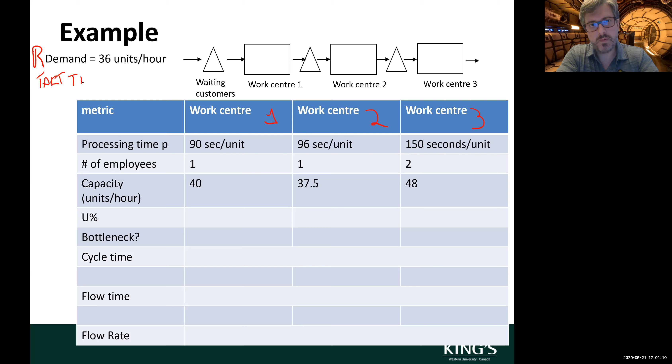So this is a simple example. I have 3 workstations here, work center 1, 2, and 3, right? And I have a demand of 36 units per hour. So 36 units per hour, this could be my flow rate, right? And if I want to think in terms of takt time, this would represent a takt time of roughly, what is it that I have again? 100 seconds, 100 seconds per unit, right? That's my takt time right there.

So I want to observe by the end of this process, every 100 seconds, 1 unit should be leaving my process. If it's a product, I'm shipping 1 unit to my client. If it's an order, it's going through. If it's a service, it's the end of the service, right? So here are the processing times. I have 90 seconds for work center number 1, 96 seconds for work center number 2, 150 seconds for work

center number 3. So by looking at the process times by themselves, I can't really say anything because it seems that work center number 3 has the highest processing time, the slowest process, so that could be our bottleneck. However, for each workstation, I have a certain number of employees. I have 1 employee over here, 1 employee at work center number 2, and 2 employees on work center number 3. So if I think in terms of capacity, so what is capacity? Capacity is P divided by A times M. I'm increasing the size of M, therefore I should be increasing my capacity, right?

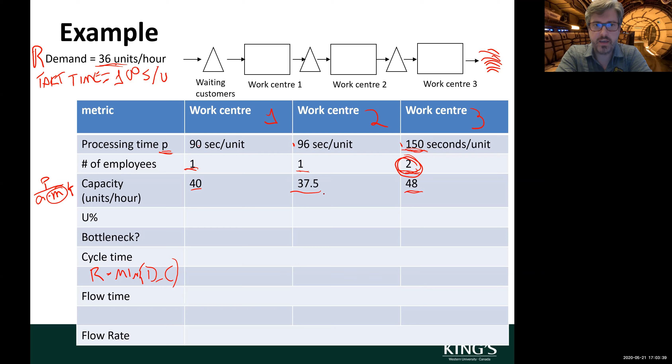So the capacity of this process, I gotta find what the bottleneck is. So the smallest capacity should be the bottleneck. 40, 37.5, and 48. So this is the bottleneck right here, 37.5, sorry. So my flow rate should be either 36 units per hour or 37.5 units per hour. So therefore, we know our flow rate is 36 units per hour. We are demand constrained, right? We have a little bit extra capacity. So we can calculate now our utilization rates.

So 40 divided by 36. So this is roughly 90%, right? So in fact, exactly 0.9. Sorry, wrong place. Just a second. Here, I apologize. There you go. Okay, so utilization rate, 36 divided by 40. This is 0.9. This guy is 36 divided by 37.5. This is 96% or 0.96. Let me move my little guy over here.

Okay. And third work center over here, 36 divided by 48, and this is equal to 75%. Right? So the bottleneck is always the one with the highest utilization rate. So as we were saying before, work center number 2 is our bottleneck, right?

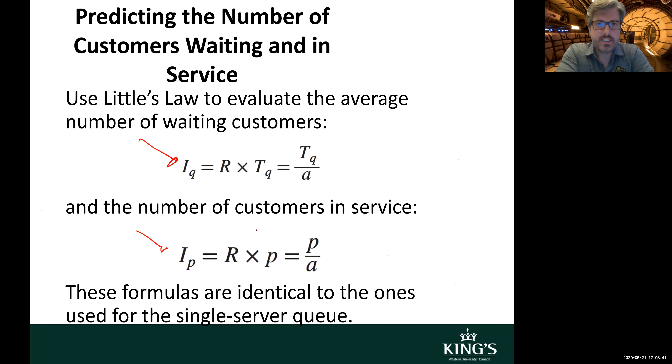So I know my cycle time here is 100 seconds per unit, as a base. And the time in queue for the first work center, considering this processing time and the inter-arrival time a equals 100 seconds per unit, is 810 seconds. The next one has a really high utilization, 96%; this one is 90%, and this one is 75%. So let's see what happens to the time in queue.

The busier you are, the more likely you are to have inventory waiting. So work center number 2 becomes 2,304 seconds, roughly about 1 hour. So in a process that takes 96 seconds, those flow units are waiting 2,300 seconds on average. These are average results in a steady state; things can fluctuate a little bit.

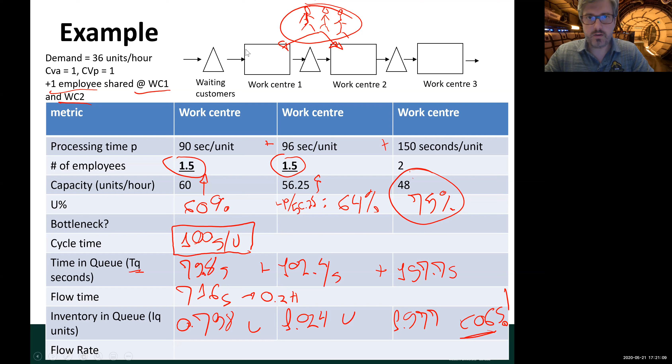Now, let's see if I can do the same stuff with Simul8. All right, so how do I exit this? Do I keep annotated? Yes, I want to keep things annotated. Okay, so now I'm going to go to Simul8, and I'm going to perform the same kind of analysis that I did there, but now using Simul8 instead. Let me make my mouse work over here. Just a moment. Okay, so here's Simul8. Let me hide this guy over here. Excellent. Gotta put my notes in here.

First thing that we gotta do with Simul8 is we go to data and rules, and then we go to clock properties. Everything that we were talking about before for that process was measured in seconds. So let's measure everything in seconds and keep that one single time unit throughout the process. Now, time format doesn't really matter. Can be time of the day, time only, percentage. I'm going to keep percentage just so we understand how far along we are in the simulation. You know what? No. I'm going to use time of the day. I'm going to make a digital clock.

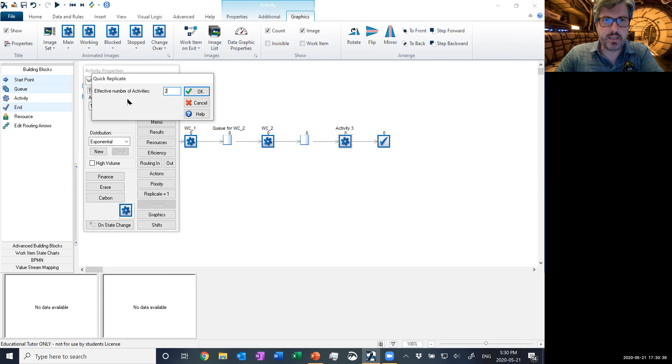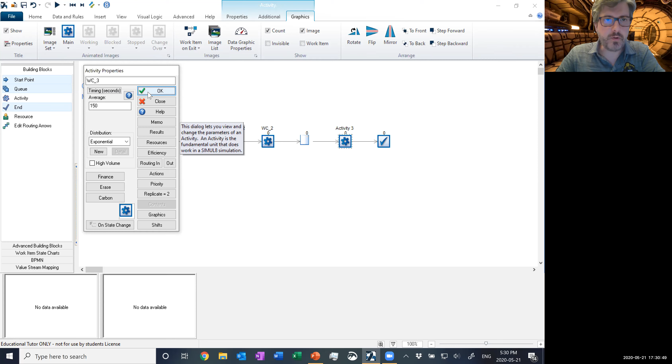Did we change the error? I think we did. So for this guy though, it's 150 seconds exponential distribution. And I do know we have 2 people. So I'm going to add 2 activities. The replication here is 2. So there's 2 activities, in fact, within the workstation, right? Excellent.

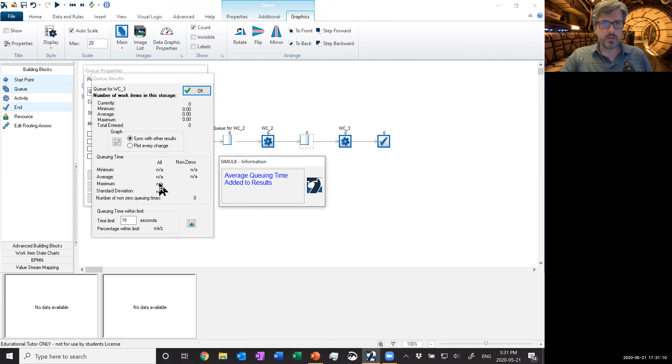Now I'm going to go to my queue. I'm going to go to results, minimum, average, and maximum number of units in inventory. And then also minimum, average, maximum, standard deviation for the time in queue, the queuing time, plus a nice little graph right there. I'm gonna add this dude over here. Yeah. Okay. Nice and pretty.

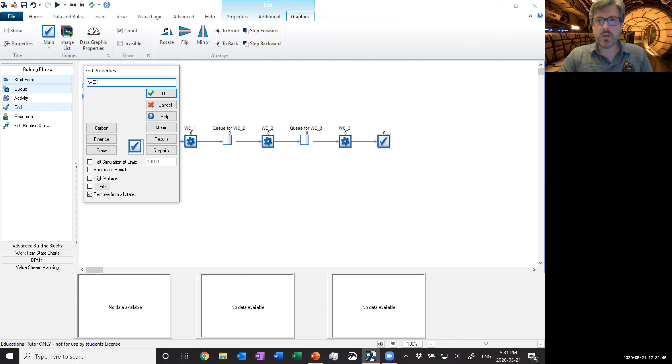We are here in the queue, so I'm going to show the queue name, and this is the exit point. So similar, we have a work entry point, WEP. We have a work exit point, WEX, and I'm going to collect results here too. The minimum time in the system, the average time in the system, the maximum, and the standard deviation. Okay, so I'm gonna hit OK.

One thing that I haven't done yet is save this file, so I'm gonna save it right now before I lose anything. So let me call this example one. I'm gonna put that in my desktop. Excellent. All right, so let's see what's going to happen right now. I will go to home. I'm going to try to set up.

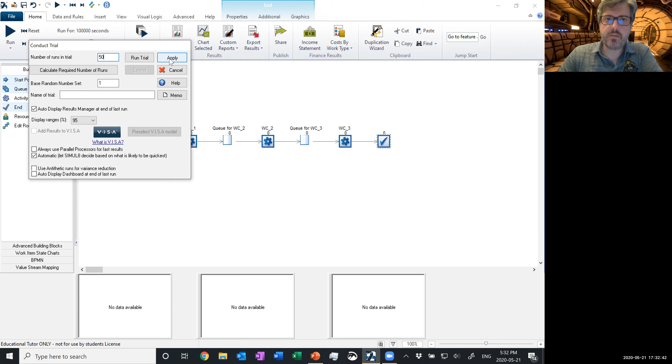So my trials are going to have, you know what, I'm going to start with just 50 runs. You can always calculate the number of runs in a trial. Use the trial calculator. Our main key performance indicator is the average time in the system, so that's going to be my KPI. And I'm going to ask Simul8 to figure out for me how many runs I should have for each simulation, so I have enough of a distribution that compensates for all the randomness, right? So hit OK.

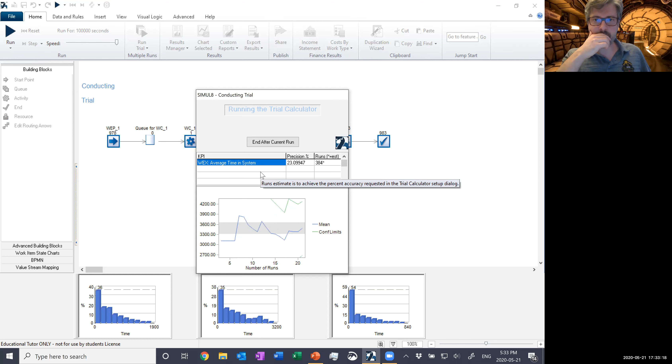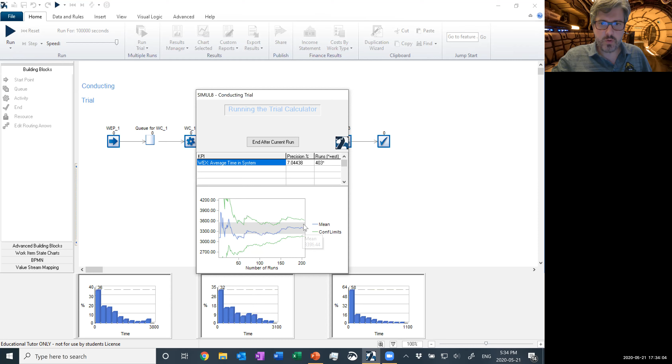So it's slowly converging, and hopefully it's going to show to me how many simulations I need. So we're around 400. This sounds like a lot. I would expect something like 100 runs should be all right. So it's converging towards the mean over here with the confidence intervals right there, right? So this process can take a little bit of time. Let's just keep this running for a little bit, see if it converges faster. I believe the moment we hit the gray area right there, we should be okay. So let's see what's going on.

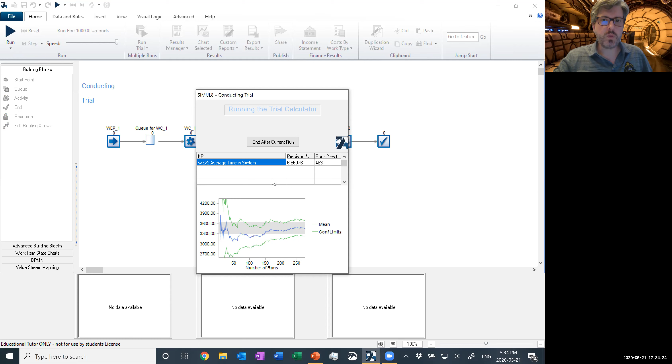So while this is doing it right here, I'm gonna go back and write down some of these measurements that are important. So the first example, the original system, I have a flow time of 3,648 seconds and inventory of about, let's see, 23 plus 8, that's 31 plus 2, roughly 33 units of inventory.

Then we solve the bottleneck. For the first time, our flow time goes down to 1,376 seconds with the inventory of 8 plus 0.3 plus 0.2. So this is 8.5 plus 2, give or take approximately 10.5. And then when we share the employees from Work Center 1 and 2, we get to a flow time of 716 seconds. And the inventory is roughly 4 units.

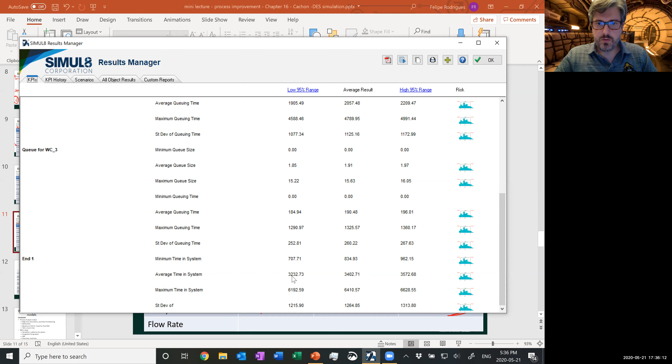Okay, so let's see what Simul8 is all about. Average time in the system, so it's recommending 431 runs. So let's see what we get from here at the work exit point. Average time in the system. So it's giving us a range between 3,232 seconds and 3,572. So it gives us the distribution of how this goes.

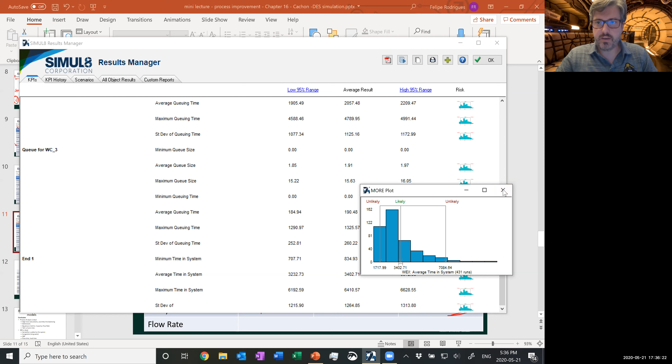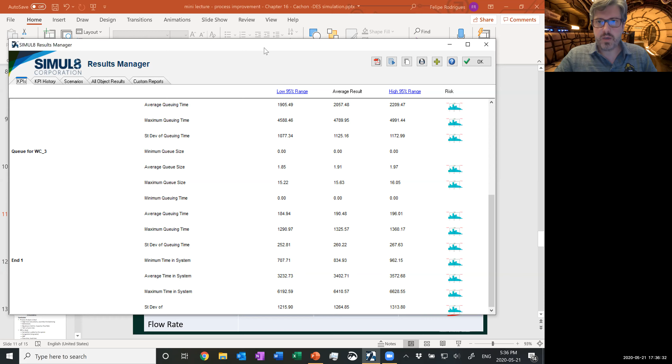Now, the interesting thing is, from the TQ formula, I had originally 3,648. So this is showing that it's a little bit lower. Maybe there's some kind of parameter that we haven't dealt with over here. So I'm going to double check. Work center number 1, 90 seconds exponential with 1 replication. That's okay. The inter-arrival time, 100 seconds exponential. That's also okay. Work center number 2, 96 seconds exponential with 1 replication. That's okay. Work center number 3, 120 seconds exponential with a replication of 2. All right, so this seems to be okay.

Simulation seems to be running right. So our theoretical result was 3,600 seconds, give or take, but our results over here are showing an average time of 3,400, going to the upper bound that we had before, right? So this seems to be running relatively well.

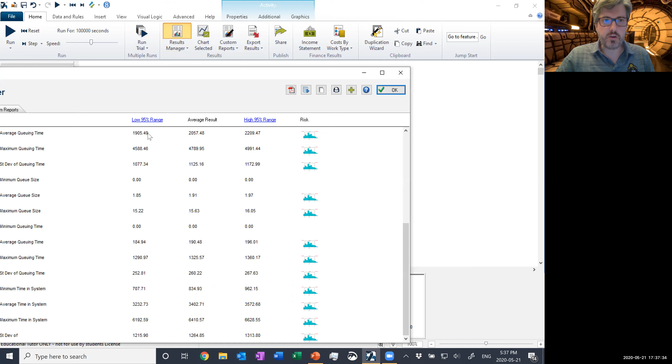Now, we can also check in terms of number of units in queue. And I would like to show you that even though the average is 3,402, look how much it goes up. The minimum time in the system can be as low as 834 seconds and as high as 6,410 seconds. So it's almost twice as much, right?

So why is that happening? That's all the variance that we added to the system. So the TQ formula and the flow times that we calculated analytically, they give us a steady state average, while using Simul8 allows us to see how much this ranges, right?

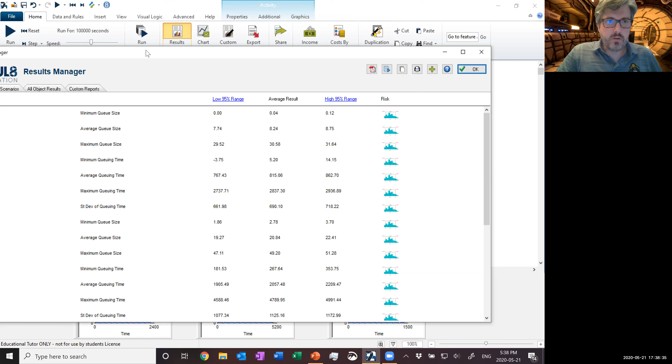Now we can also look at it in terms of the queue size. So for example, the first queue had an average size of 8. So we can also calculate that too. So queue for work center number 1. Compress this a little bit. Right, so check it out. The average queue size is 8.2 with a minimum of 0.04, so almost no queue whatsoever, but as high as 30 units, give or take, 31 even.

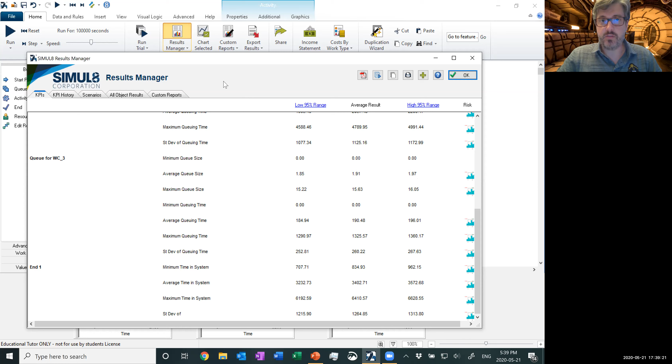If we go to queue number 2, the average queue size is 20; our formulas gave us originally 23 units. So it's a little bit off what we calculated before. And the queue for work center 3, the average queue size is 1.91, and we had calculated 1.97. So there you go, we have it right there. So the simulation seems to be running okay, a little bit on the faster side. So I'm gonna save this now. And now let's implement some changes, right?

So the first change is work center number 2 needs 2 employees. So I'm going to replicate this and say it's 2 and hit OK. So just making sure our system is according to what we expect. 90 seconds for the first one, exponential with 1 replication. Work center number 2, 96 seconds, exponential with 2 units. And work center number 3, 150 seconds with 2 units, also exponential.

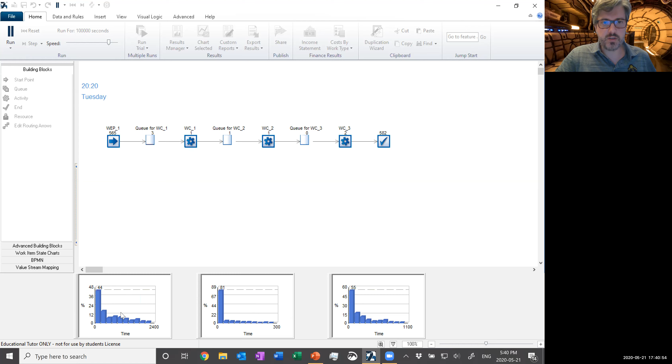Okay, so I'm gonna hit home, press reset. Gonna put this to the end of the warm-up period, and I want to observe what's gonna happen with our queues right there. This is relatively slow. I'm gonna speed it up a little bit more, so we see what's happening with the queuing time. Now that we have 2 resources on work center number 2, there's almost no queue forming over here, although there is still a queue forming on work center number 1, and we know what that queue would be like. Queuing time there is expected to still be at around 810 seconds, so it goes as high as 2400, right?

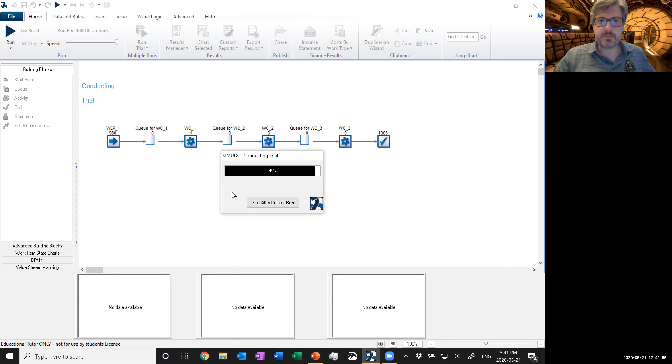So I just ran this simulation right here. Let's see what the results show us. Average time in the system at 1036, we might need to run a trial. I don't want 400. I'm gonna make this 100 units for now, just so we can collect results a little bit faster. So I'm running 100 simulations right now with the same system. So we are changing seeds and incorporating all the variation in the system, right? Okay, excellent.

So let's look at our key performance indicator. The average time in the system right now is 1213, but it goes as low as 67 seconds. How the hell did that happen? And as high as 3400 seconds going through. So this is incredibly long, right? But we know how this is ranging.

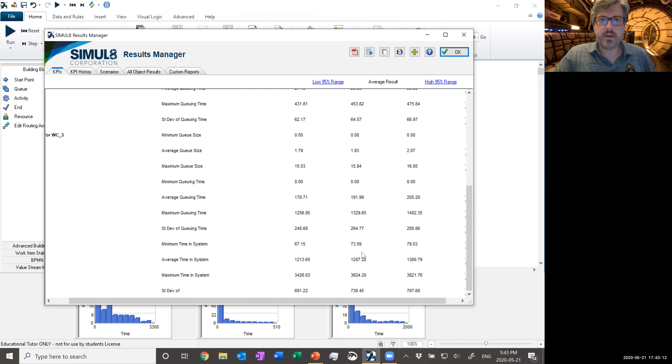And our initial calculations, when we added 2 units over here, we were expecting to have 1,376, and the simulation is showing us 1,213. So it's a little bit faster than we expected. Right. But see, in the high range, 1,360, so we're getting close there, right? The simulation seems to be performing well, and we can look at the inventory also.

So the inventory right here, average queue size is around 6 to 8 units. Our theoretical was 8.1, and then for work center number 2, the average queue size now drops dramatically. Our initial result was 0.31. So we're at the upper side of this over here. And for Q3, still the same average queue size of around 1.97. So we're still within the bounds that we expect.

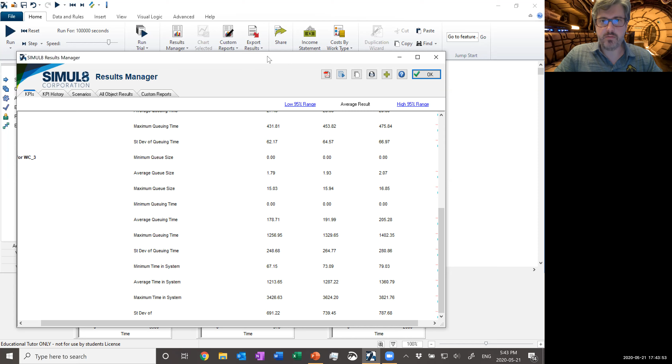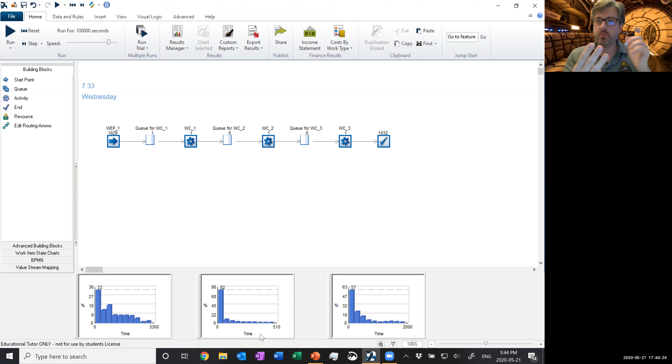Excellent. Now, the first improvement we did in the process, which was adding 1 worker to work center number 2, seems to be behaving well. Now, the second option that we had was what if we could share resources from work center number 1 and work center number 2? So what if we had 3 employees, but they could work at both work center number 1 and work center number 2? So in order for us to do that, we have to create resources in Simul8.

So I'm going to do this right now. I'm going to use resources, and I'm going to say add a new resource. I'm going to call this resource number 1, and we're going to have 3 people on resource number 1. We have 3 resources number 1, okay? And these are going to be used for work center number 1 as well as work center number 2.

Oh, they showed up here already, so I'm going to put them over here. Work center number 2, resources. I'm going to add resource number 1. There you go. So workers can go from work center number 1 and work center number 2 according to their need. So because I had 3 workers, I'm simulating that idea that I have 1.5 worker at each work center. That's what I'm trying to simulate right now as best as I can.

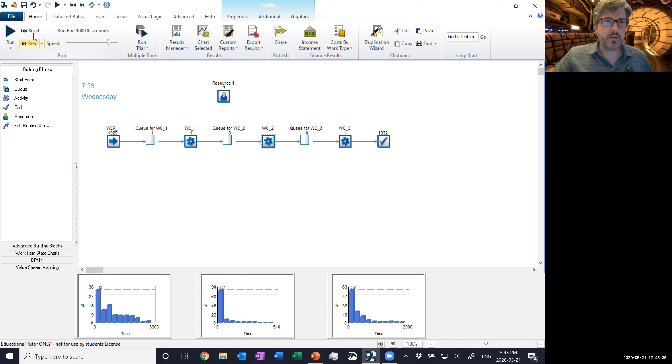So I'm gonna reset the simulation. Gonna go to, oh, you know what? Work center number 3 doesn't have any resources. So I'm gonna add a resource for workstation number 3. I'm gonna call this something else. I'm gonna call this resource number 3. And I know we have 2 employees there, so there's 2 resources there. Okay. There you go. You guys show up over here.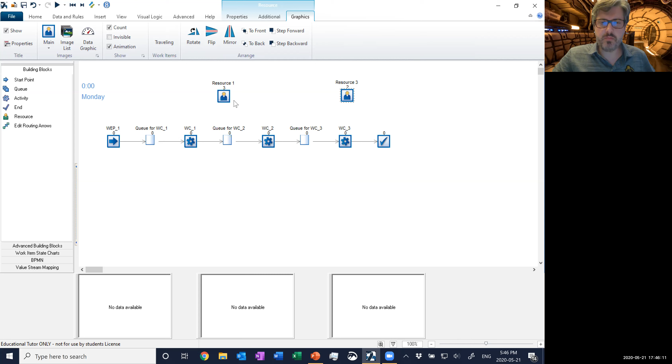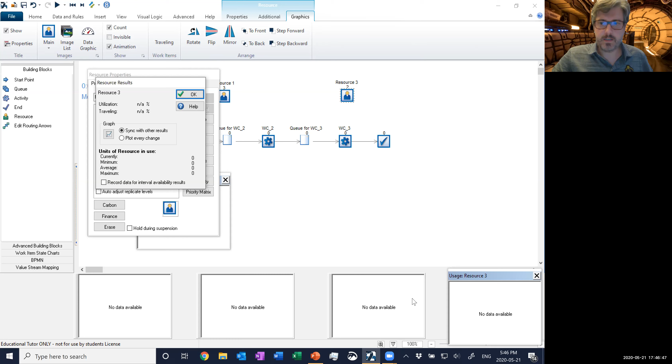And you know what else I'm gonna do? I'm gonna add a result. I want a graph. I want the utilization of that resource. I also want a graph of the resource right there. Okay. And because I have the usage of resource number 1, I'm gonna want that too for utilization of resource number 3. I'm gonna add my graph over here.

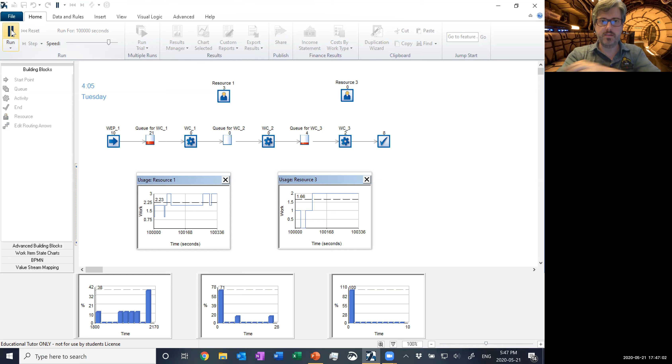Okay, excellent. So I'm gonna save this guy for now, reset. Okay, go to the end of the warm-up period and run the simulation. Let's see what happens. So should probably hide this guy as I'm running my simulation. So almost, we don't see a lot of queues, a lot of inventory forming. It goes up and down a little bit, but then you can see the utilization here.

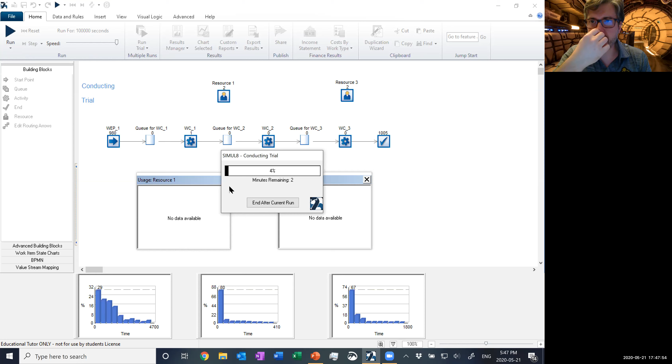I'm using on average, give or take 1.8 of that resource out of 3. This guy on average 1.5. So 1.5 out of 2, that's the 75% utilization that we are expecting to have, right? And I just ran simulation. Now I'm going to run a new trial. Hopefully it's going to be fast. When you add resources, it kind of slows it down a little bit more.

But the idea that having a resource is interesting because it allows you to look at the utilization of each one of those resources as an extra metric. Plus, it can give you the idea of sharing resources. So for example, if this were some sort of, say, a hospital, right? So it's a nurse. So a nurse can go to different beds. So it's the same resource going to different work centers. Each bed could be a work center, for example. Or this could be a call center where you have a customer representative and that guy can perform multiple roles.

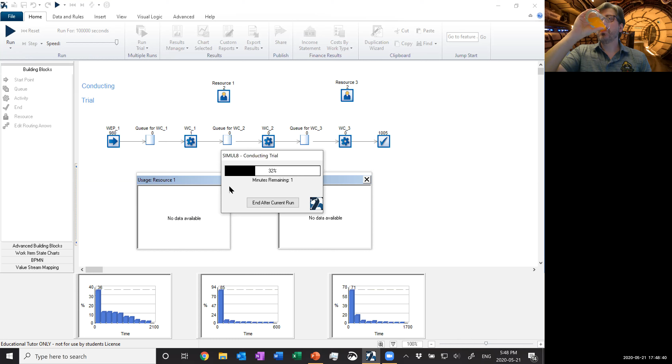So it's interesting to add the resources because it gives you extra functionality as well as allows you, for example, to work with shifts. So the resources can have different shifts. We can also have not only shifts, but then there could be absenteeism with the resources. So they skip work, they become unavailable. These could be machines. This could be a whole bunch of things, right?

So one of the things that I'm thinking right now is that maybe the simulation time is not long enough. So if I were to run a simulation longer, 100,000 seconds for warm up and 100,000 seconds for collection period may not be enough. So I'm gonna run this trial right now. If I still get results a little bit lower than I'm expecting, it means perhaps that I haven't reached entirely the steady state. So let's see what we get from these results, and see if we need indeed to test the hypothesis that it would take longer to reach a steady state.

So what's going on with this trial right now? It's at 80%, but we're getting pretty consistent results, right? Utilization resource 1.86. 1.86 out of 3, so that's about 60%.

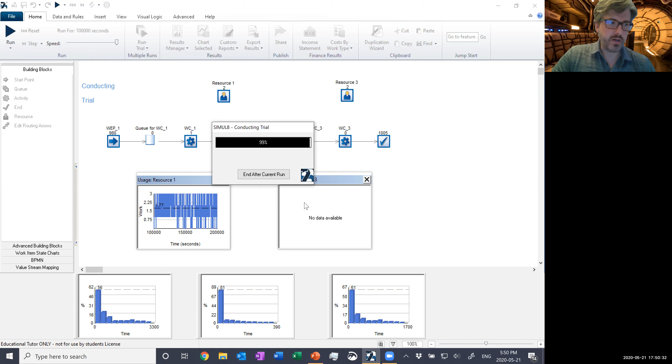Let's look at this guy. Let's see, 1.5. Yeah, 1.5 out of 2. That's about 75% utilization. There you go. Now we have results. So let's track some of these guys and see what happens.

So I'm going to focus on the average time in the system. Let's see what happened. So the average time in the system now is 1,287, and I was expecting this to be 716, give or take. So this seems to be a little bit high. The utilization in terms of percentage points seems to be okay.

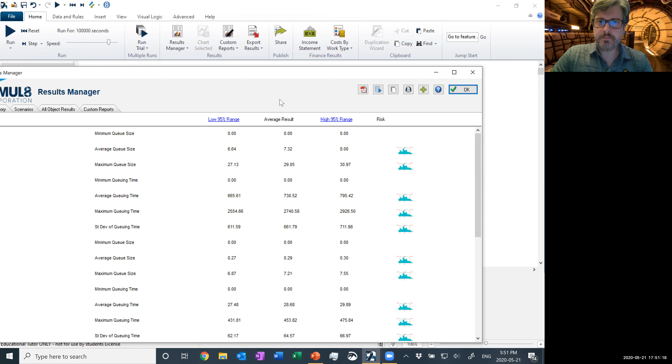So I think that maybe I should be running the simulation for a little bit longer. So I'm going to go to data and rules, and the warm-up period, I'm going to make this 1,000,000 seconds. And the results collection, I'll also make this 1,000,000 seconds, okay? And I'm going to run one simulation just to see how the behavior changes. Let's see. Okay.

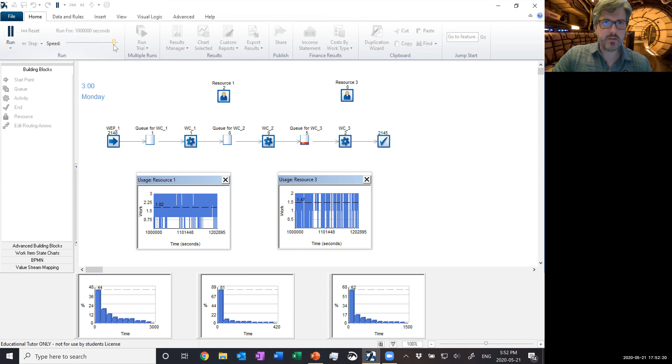So I'm going to speed it up. Right. So you can see the queues forming over here, not necessarily over here, which is interesting. 1.79 utilization, 1.46. This seems to be okay. Yeah, so I think this is running all right. I'm gonna go all the way up to the end of the simulation and see how that result goes.

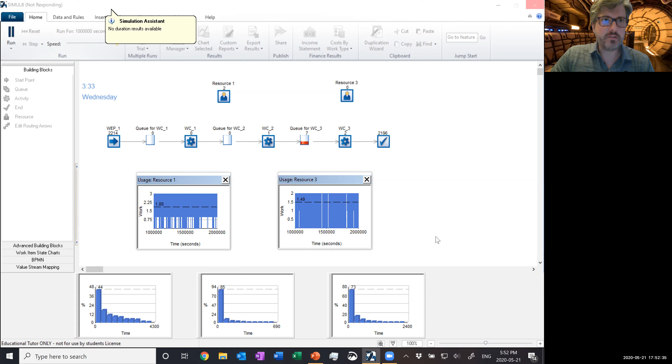Okay. Oh, please don't crash because I'm recording. I'm recording this video right now. I don't want this to crash. Oh, thank God. Sorry, I have a really old computer, so sometimes these things happen.

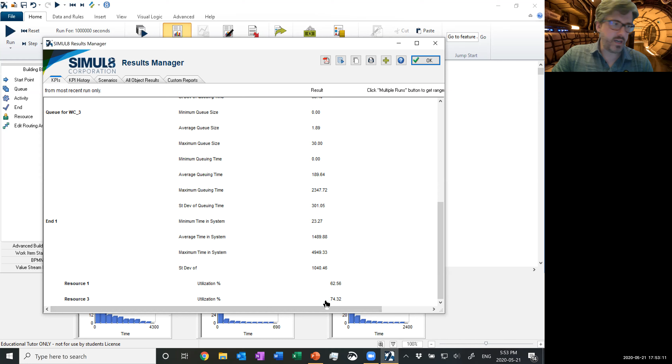Results manager. Let's see that one particular run. What is it that I get from this simulation? Okay. So average time in the system. Now it's showing 1,500. I think utilization at 62% for resource number 1 and 74% for resource number 3. This is interesting. I'm finding this to be a little bit high. Let's see if I can spot what's going on right now.

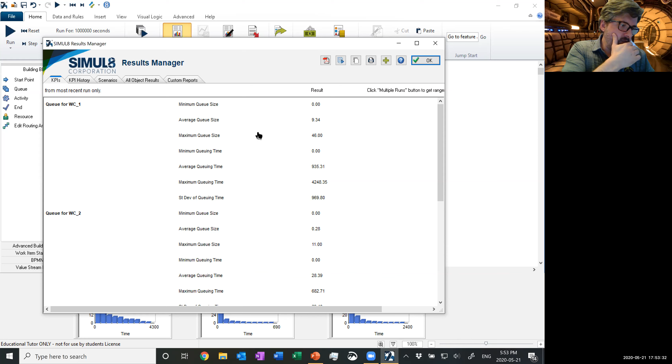The average queue size for the first guy is supposed to be 0.7, but it's still 9.3. So I think I just spotted my mistake. How many replications do I have for work center number 1? Oh, there's a mistake right there. Excellent. So I'm sharing resources, but I should be able to allow 2 people to be working at the same time at resource number 1.

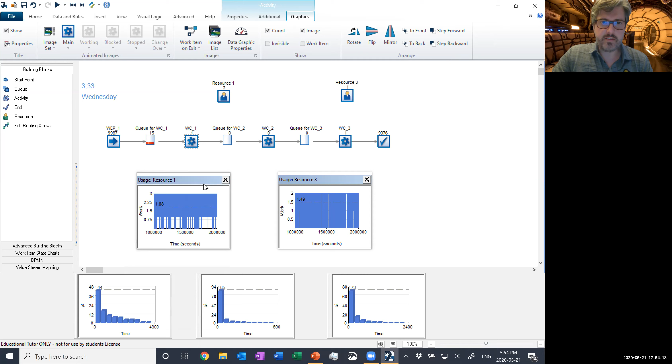That's what it is. So now I have 2 spots at workstation number 1, and I can have 2 people working at the same time, but on average, they could be shared with work center number 2. So it's 3 resources to be shared with these 2 guys. I think now we're gonna be good. Let's see. I'm gonna go to the end of the warm-up period, and let's see how this goes. Pretty sure it's gonna be very consistent now.

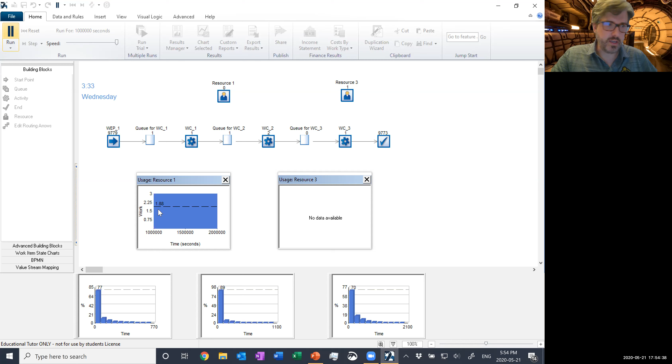Okay, so 1.88 out of 3. This is roughly what we expect, around 60 to 64%. 1.49, this is also around what we expect. So let's look at the results manager. Let's see what it says. There you go. Average time in the system. All right. So this one particular run is 600 seconds, and I'm expecting 716 seconds, give or take. So what we know, the utilization seems to be okay.

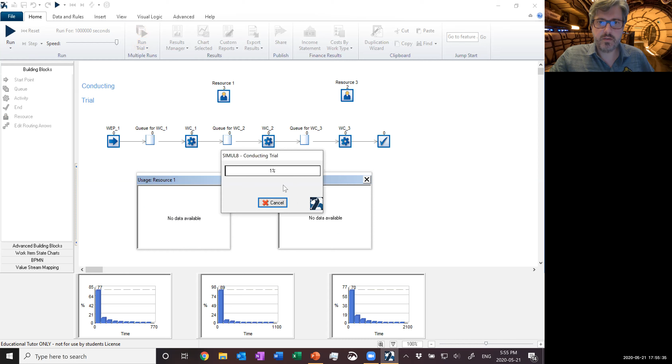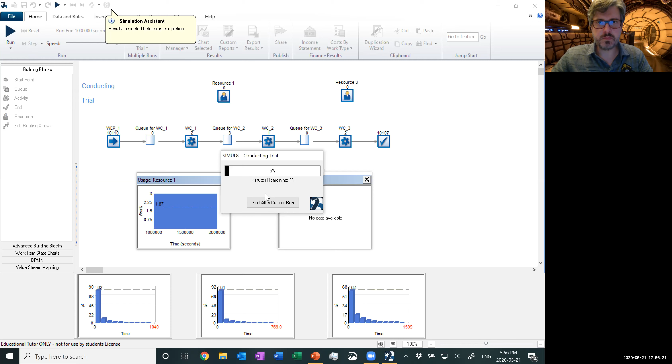So it might be an issue with our trial, right? So we ran once. So maybe I want to run this trial again. So I'm gonna make it a little bit faster, just for the sake of time within this video. So let's see. Hopefully it won't take too long. Sorry. Okay, so we're almost done with this trial. Let's see what kind of results we get and compare that with the analytical results that we had from before.

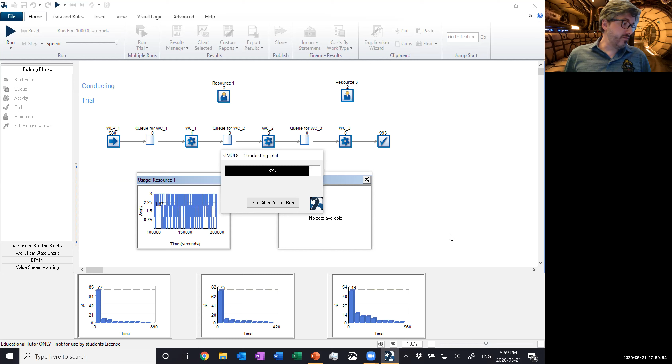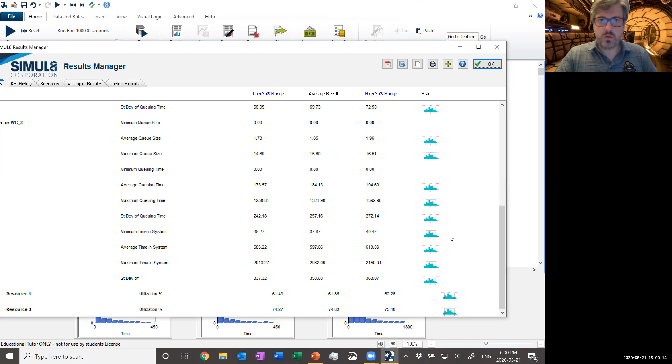Okay, 92%. Excellent. All right, there we go. So let's see what's going on right here. Okay, average time in the system now is running from 585 to 610. So this is more around the values that we were expecting before, around 700 seconds, right? And utilization rate seems to be performing well. We were expecting between 60 and 65. So around 61 for resource number 1, and for resource number 3, around 75%. So these results seem to be making sense.

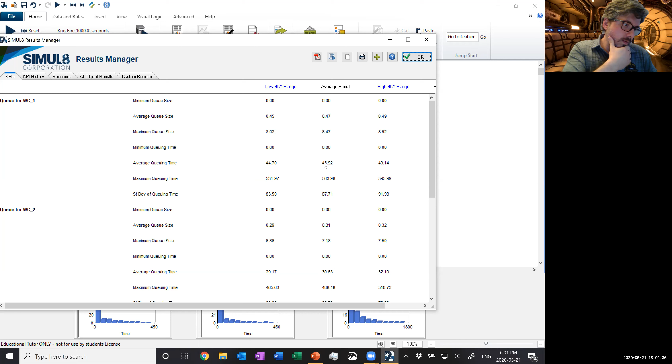So let's see, average queue size of 0.47. Where do we get from? Let's see. So now I have a much lower queue. Queuing time. Let's see what the queuing time is. 46 seconds. That's one employee. All right. So queuing time around 79. So this is a little bit faster than I was expecting from before.

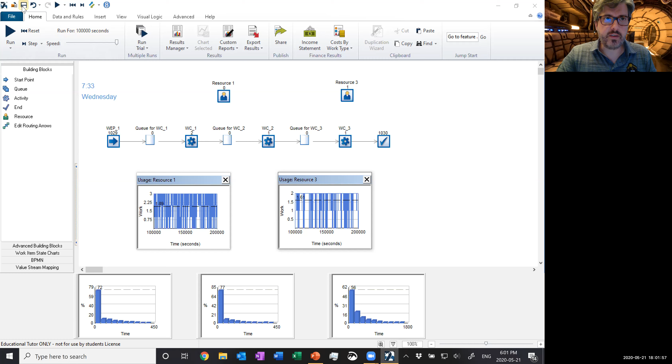And for the last one, average queuing time in the system 184. I'm expecting 147. So this system seems to be performing relatively well. Let's save this guy right now. And let's go back to the PowerPoint presentation. Oh, maybe I can reduce my, there you go.

So let's look at what we had before. When there's no variance, we can't really calculate the time in queue, and we can't really calculate a lot of inventory, right? But as we add variance to the system, we can calculate time in queue and inventory, which allows us to understand in terms of what our flow time is.

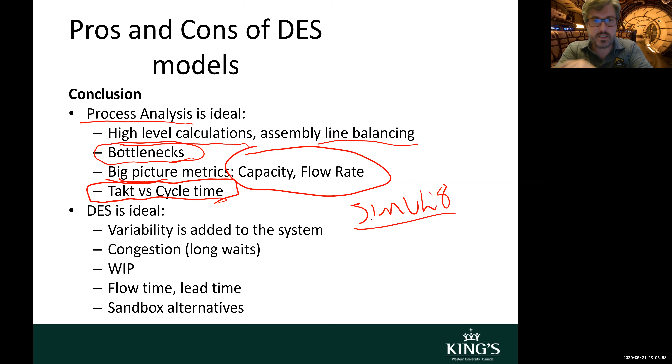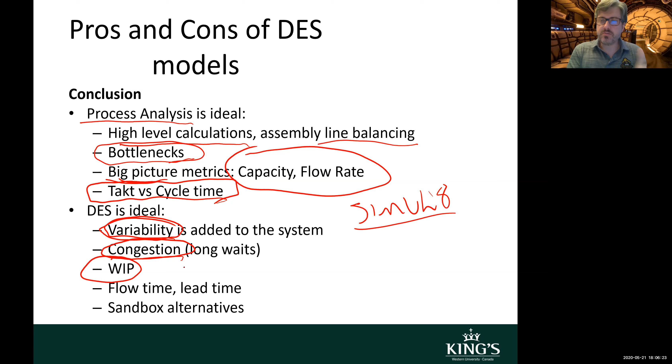When is it that you use a discrete event simulator model like Simul8, for example? When there's a lot of variability in the system, that's important. Another one is when you know the system is congested. So every time you have lots of inventory, discrete event simulation should be good for you. It will give you more insights about your inventory, right? It will give insights about people waiting in line. It's a toll booth, it's a call center, it's the emergency room, it's your restaurant and whatnot, right? More recent example, it's testing for COVID-19, which seems to be happening right now. Hopefully in the future, this won't be relevant anymore.

But very importantly, when you are interested in terms of flow time and lead times, that is a key moment. So perhaps your clients want to know precisely when they can expect their products. Running discrete event simulations allows you to see precisely what your lead time actually is, right? Because there's variability in the process. And another key point, a discrete event simulator is like a sandbox. You're using this to make decisions. You're using this to test hypotheses, right? So think of this as a sandbox, a low-cost alternative to figuring out what-if scenarios.

Ultimately, we're operations managers. We want to be able to make decisions. So the discrete event simulator is an excellent way of introducing changes to your process without actually implementing them before. So you get to test. It's an excellent tool for testing scenarios and for testing different alternatives and see which one works best.